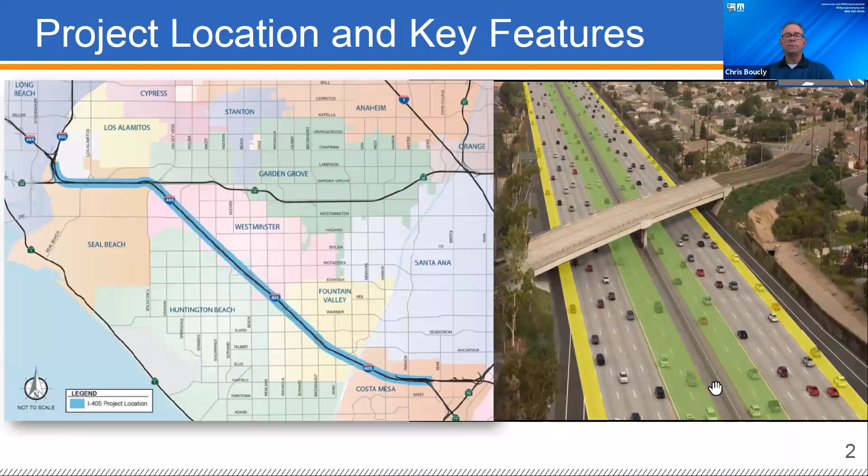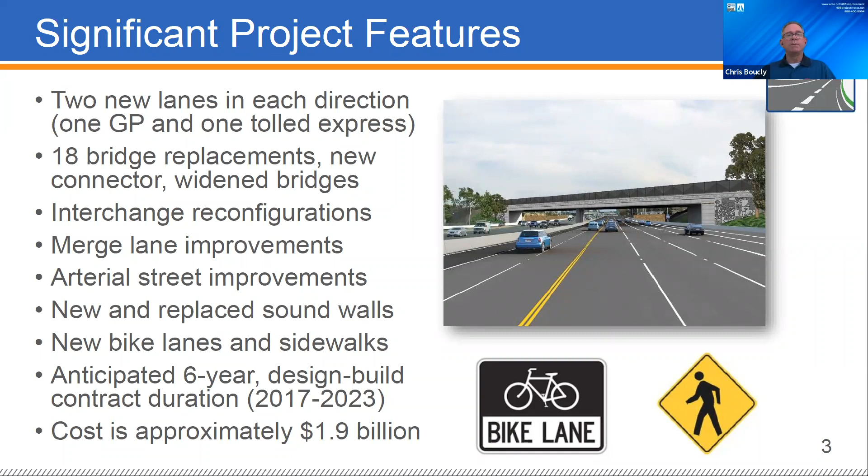On this slide, you can see some of the major features of the project. We are replacing 18 bridges, widening 4 others, and constructing a new express lanes connector between SR 73 and the 405. We're also building more than 150 walls throughout the project area, and there will be new bike lanes and sidewalks on all the replaced bridges. The overall cost of the project is approximately $1.9 billion. Next, I'm going to provide a brief update on construction activities.

We're very excited to share that the project is more than 55% complete, and we've got more than 1,000 workers involved in the project each day. These next several slides are going to show construction progress out on the project.

On this slide in particular, you can see 3 of the bridges that are complete and open to traffic. Slater is shown on the left, Bushard in the upper right, and McFadden Avenue in the lower right.

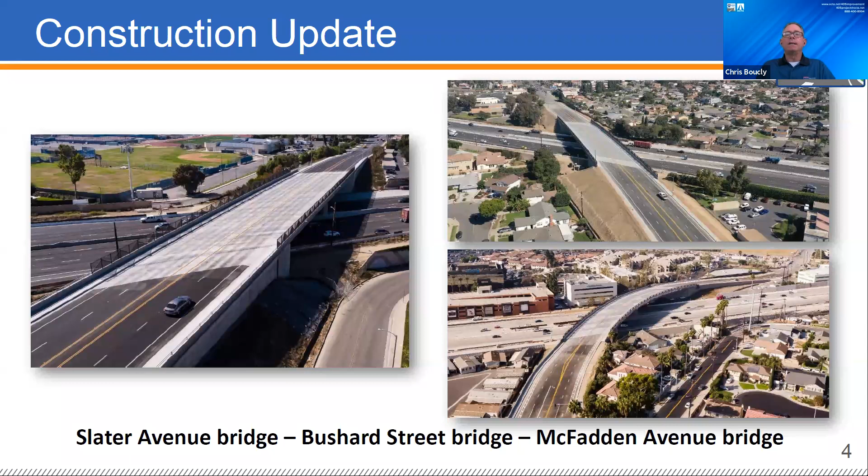This next slide shows the recently opened Talbert Bridge on the left and the soon to open Magnolia Bridge on the right. That's actually set to open this weekend, so we're really excited about that. It is the first 2-phase bridge on the project to fully open to traffic. With Magnolia and Talbert bridges open, we will begin reconstruction of the Warner Bridge, and that's what we'll talk a bit more about later in the presentation.

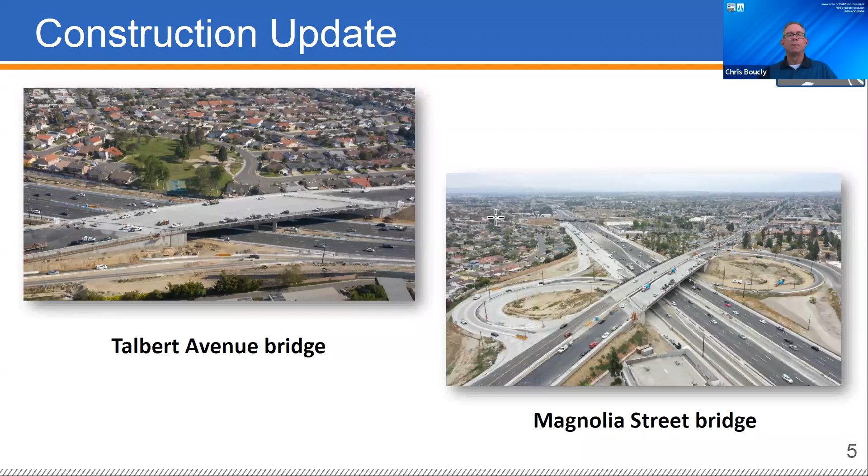In this slide, the photo on the left shows the reconstruction of the Heil pedestrian overcrossing. This new pedestrian overcrossing is expected to be completed and open later this year. The photo on the right shows some of the reconstruction work going on at Edinger Bridge, and that's expected to open to traffic around the end of this year. Once Edinger is completed, we will be reconstructing the Newland Bridge.

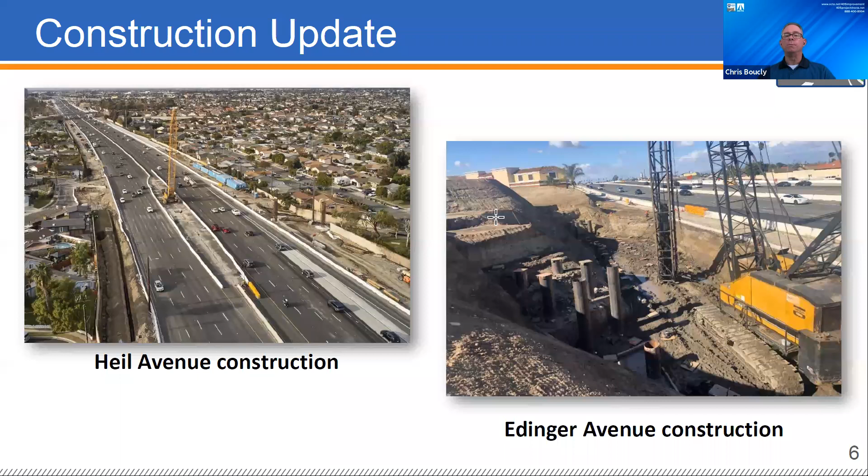This next slide shows construction at Beach Boulevard. The photos on the left show some of the aesthetics features on the walls under the freeway bridge, and the photo on the right shows ongoing construction at the Beach Boulevard interchange. The improvements being made to this interchange and on Beach itself will improve safety and traffic operations. It's a very important local street here when it's done.

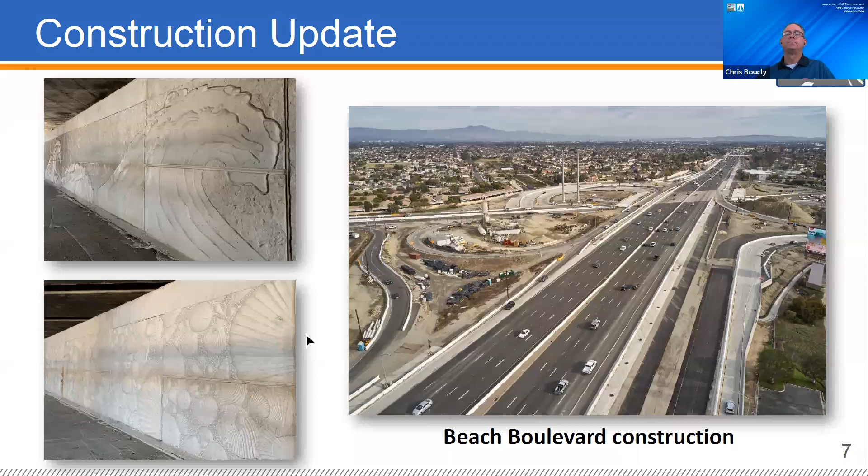This is one of my favorite slides to show at this point. It wasn't always that way, but it shows the 4 bridge replacements that are complete and open to traffic: Slater, Talbert, Bushard, and McFadden. The only bridges that have not yet started construction are shown in red, and we anticipate work will start on those bridges later this year or in early 2022.

As you can see, we have a significant number of bridges under construction, shown in orange. By spring 2022, we also anticipate having 10 of the 18 bridge replacements complete and fully open to traffic. In addition, all 4 bridge widenings, like those at Harbor Boulevard, should be completed.

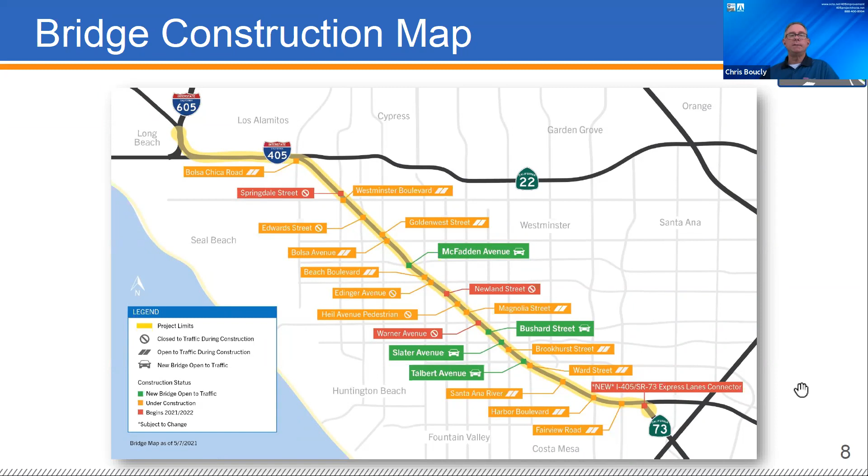All right, I'm going to jump into the Warner update, and that'll get us a little closer to the Q&A, which I know everybody has several questions about.

So the crews, once we close the ramp and the bridge, that same night and through the morning of June 5th, they're going to close the Warner Avenue off ramps - those are the loop off ramps. The on ramps will remain open, but for a few days after the bridge closes, we're going to close the loop off ramps because we're going to be constructing new temporary off ramps. The northbound I-405 loop off ramp will be realigned to output traffic onto eastbound Warner, and the southbound I-405 loop off ramp will be realigned to put traffic onto westbound Warner, since the bridge won't be there any longer.

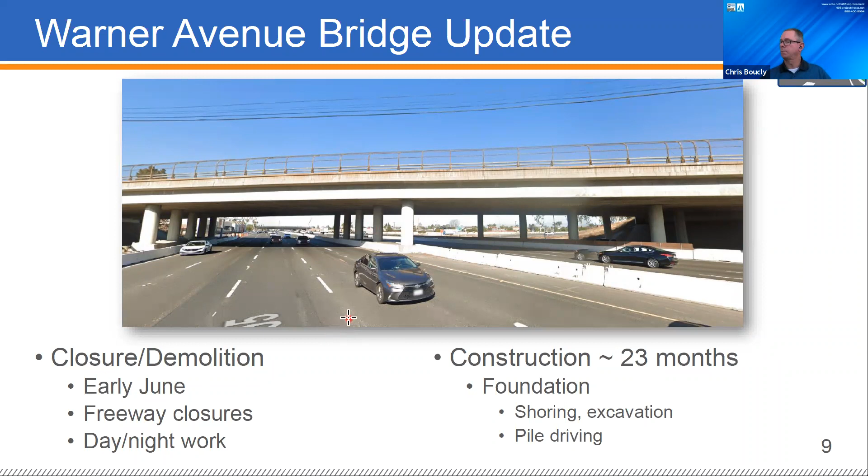That is the abutments and the columns. As you see here on the left and on the right, these are the abutments, and then they'll have center columns. So after substructure is done, we're out of the ground, building up, with the abutments and columns in place.

Then they work on the superstructure itself. That's this part of the bridge you see here, the bridge itself. They'll start by installing false work, the steel beams and timber used as a support system for the bridge while it's being built.

Then they'll do form work, installing forms. These bridges aren't 100% concrete, not a monolithic piece of concrete because that would be far too heavy. So there are cells inside the bridge, open cells, created using wooden forms. Then they put in rebar, this reinforcement steel rebar. Then they pour concrete, and that forms the bridge itself as a series of cells.

So once they finish the substructure and superstructure and you've got what looks like a bridge, they'll pour the bridge deck, so you'll see that covered. They'll then work on the ramps as well, expected to be reconstructed over a 12-week period. That may actually happen sooner than completion of all the other work, because this is supposed to happen in 2022, and the bridge itself we don't expect to open until mid-2023.

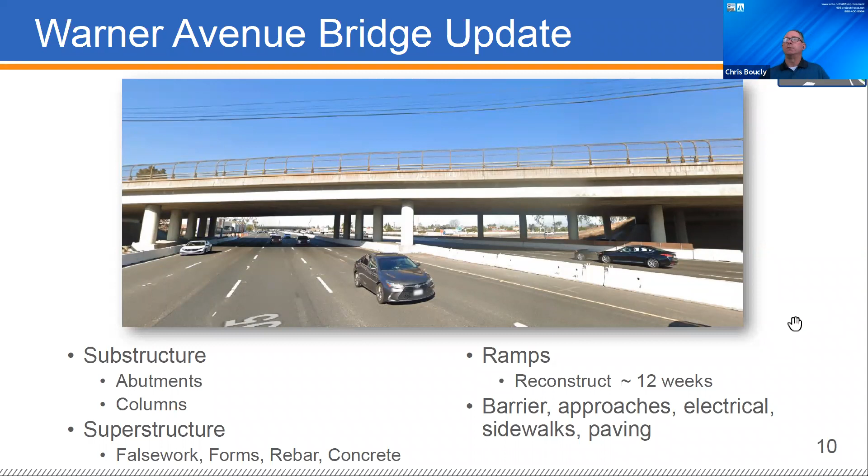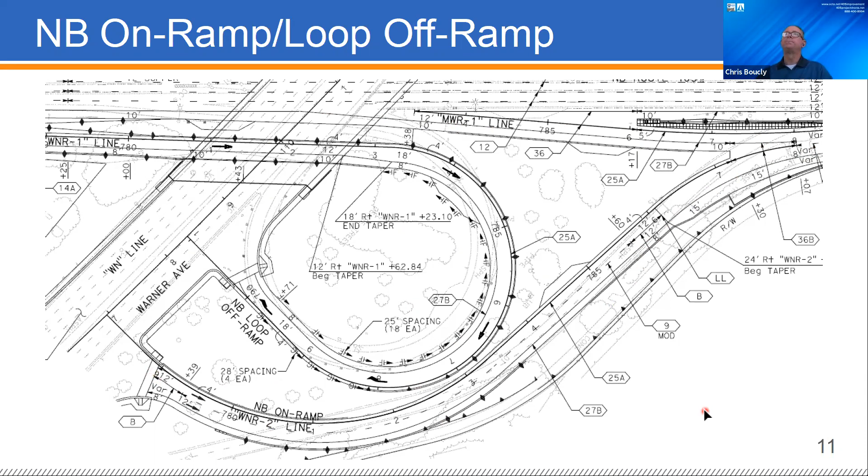Chris, while you're working on the next part, there will not be a traffic signal, I got confirmation from the technical team. Okay, what about a stop sign? I doubt we'd stop people on the freeway, so most likely no stop sign either, it's probably just a free right. We'll confirm, and we're working on putting the detour maps in the chat, so look out for those, everyone. Fantastic. By the way, I keep looking up because I've got a second monitor here with the presentation on it.

So the last thing I want to address before I hand it over to Nikki to talk more about our engagement strategies is we want to acknowledge that initially the plan was to do Warner in 2 stages. This now means we're closing Warner completely and doing it as a 1-stage bridge, and it'll be under construction for about 23 months.

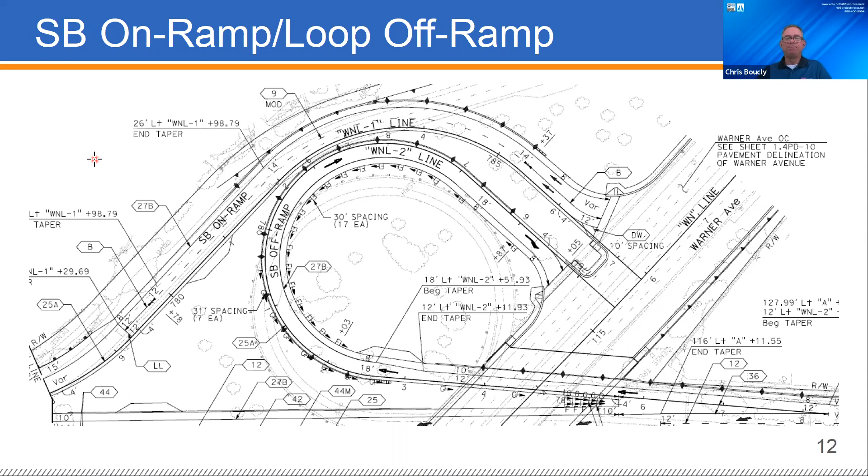And just a few pieces of information that you were asking us to check on. No stop sign, we confirmed. The off-ramp lanes are going to be free right movements. Free right movements, that makes sense. Thank you. Yes, no problem.